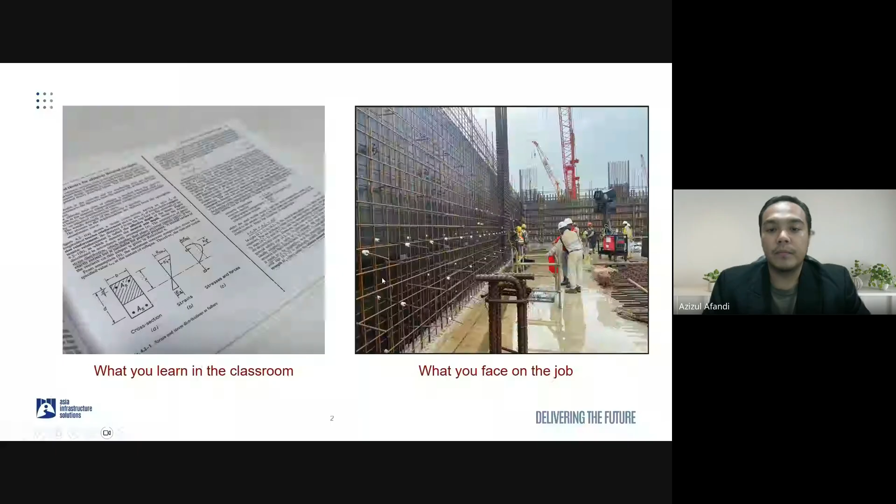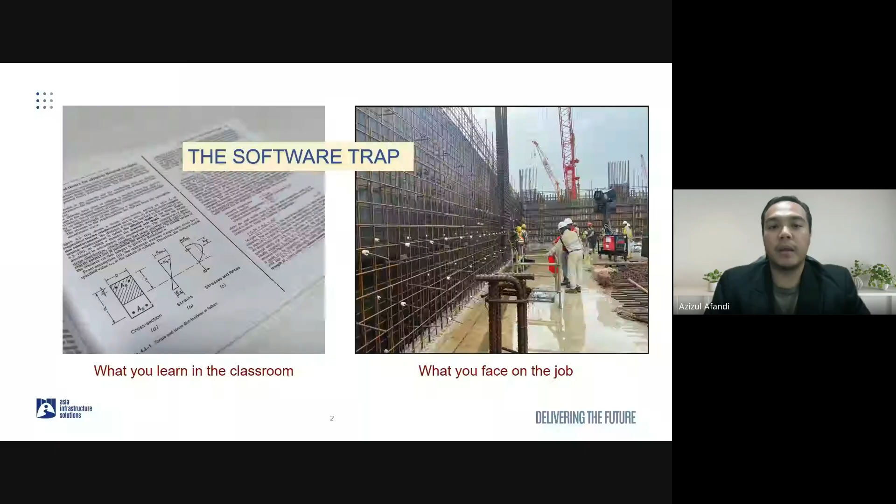But there's some dilemma when you start work. First of all, you will be overwhelmed by the software, so some new students or fresh graduates might get trapped in the software - we call it software traps. And also there will be real world constraints, and we also need to apply engineering intuition.

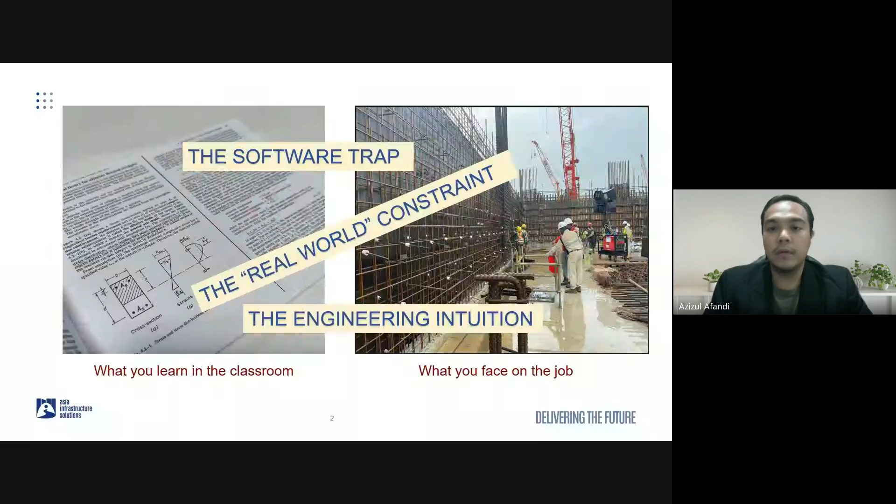So today we're going to go through around four basic topics. The first one is the design flow, how we do a typical bridge design from the blank page to buildable drawings - but I'm not going to go through the design parts in detail, just explain the flow of the work overall. The second one is a case study I prepared, one of my previous jobs, the rail track slab design - a simple structure but quite interesting. The third one is the sanity check, how we ensure our model is correct. And the last one is the rule of thumb for engineers, which I'll touch on a bit.

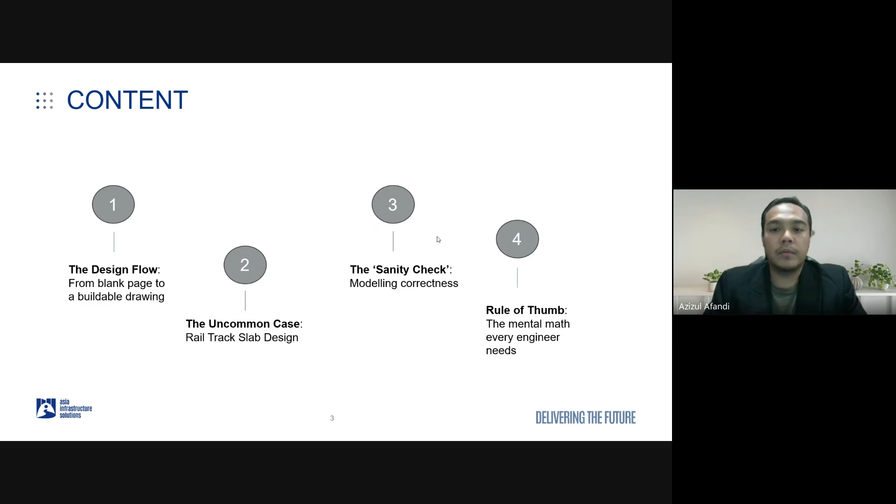So let's go straight to the first topic, which is bridge design flow.

I'm not sure whether your course has a bridge design module. For myself, I previously learned bridge design during my master's; during my degree, I wasn't exposed to the bridge design concept. Basically, bridge design is quite different compared to typical building design.

So in general, when there's a project, the first thing is that we need to plan. We need to have the plan and what is going to be done. Then after that, we're going to get the profile, because this is the bridge. Usually a bridge will serve either roads or rails. So it's either coming from the road engineer, rail engineer or alignment engineer. It depends on the type of the project.

So then the alignment engineer usually will provide the profile, the design profile, and then the sections of the road or the rail: what the width is, for example, how wide the road is, is it the typical R2 JKR road, or is it a highway? So that is coming from the alignment engineer.

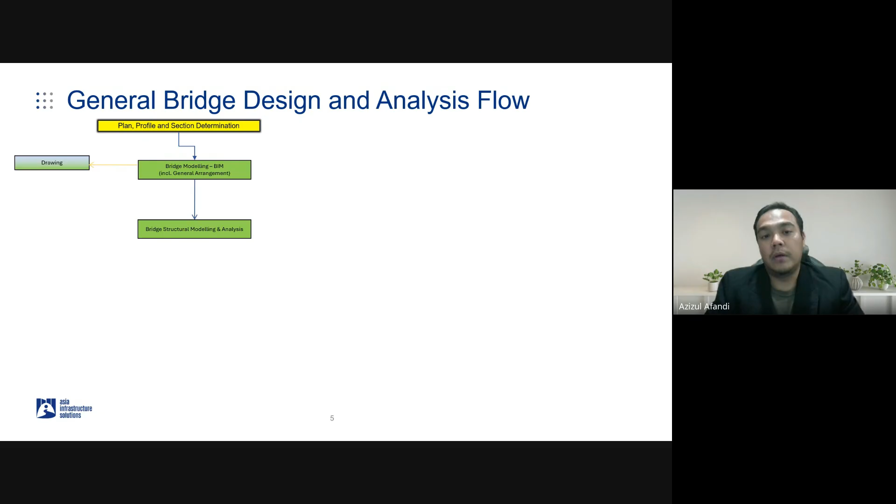So he will straight away get the drafter to start the design concurrently, instead of waiting for the modeling and the analysis design to complete. So this process goes concurrently.

Okay, so before the engineer starts the modeling and analysis, of course, we need to gather the information, like what's the load input that we're going to put in our models, what are the load combinations, the information from other parties, like from geotechnical parties, to get their information on the soil modulus and also the soil springs, for us to model in our software. So all these have to be based on the relevant codes or codes of practice.

For example, in Malaysia, we are now moving to the Eurocodes, or sometimes we still use BS code. So it depends. Singapore is already fully using Eurocodes, and Singapore even has its own Singapore annex. For Malaysia, some of the codes still don't have the Malaysian annex, especially for bridges. I think it's still following the UK annex. So from the codes we determine the loads. For example, for the bridge, how we determine the wind loading, the temperature loading, the traffic loading, everything is from the codes.

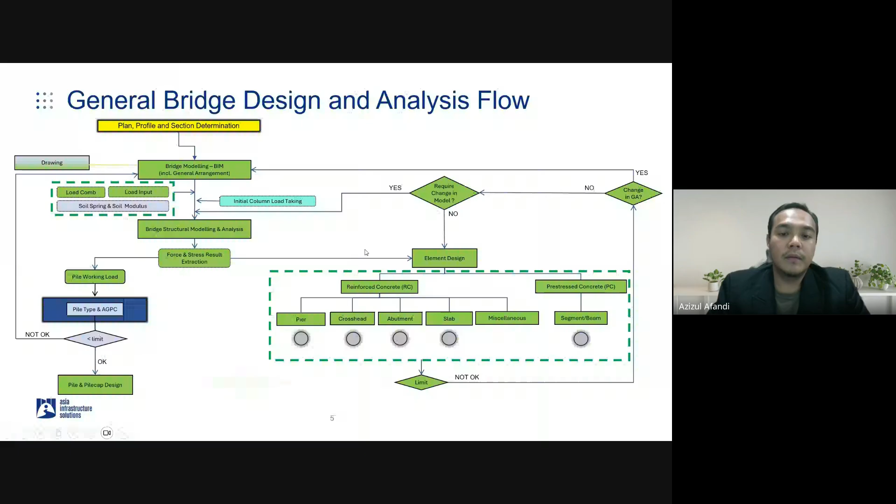Or if we need to change the structure model, then we go back to our modeling, and again we change everything. Then the same process comes again until everything is fine. Okay, then if everything is okay, we have to determine whether we need to do optimization or not.

What is optimization actually? I seldom heard the term during my study last time. But when we come to the industry, we will always hear this terminology, optimization. Usually the client will love this terminology because optimization means that we design it close to the limit, meaning it is a very economical design. So the client will like it.

So if we need to do optimization, meaning our prelim size, for example our prelim crosshead, is too thick or too wide, and after our analysis we found that the utilization ratio is just maybe 0.6, so we have around 40% buffer, definitely we have to justify to the client why we designed it that way. So in that case, we have to do optimizations. We come back to our modeling, then we reduce the size, for example, or increase the rebar, and then do it one more time until it's optimized.

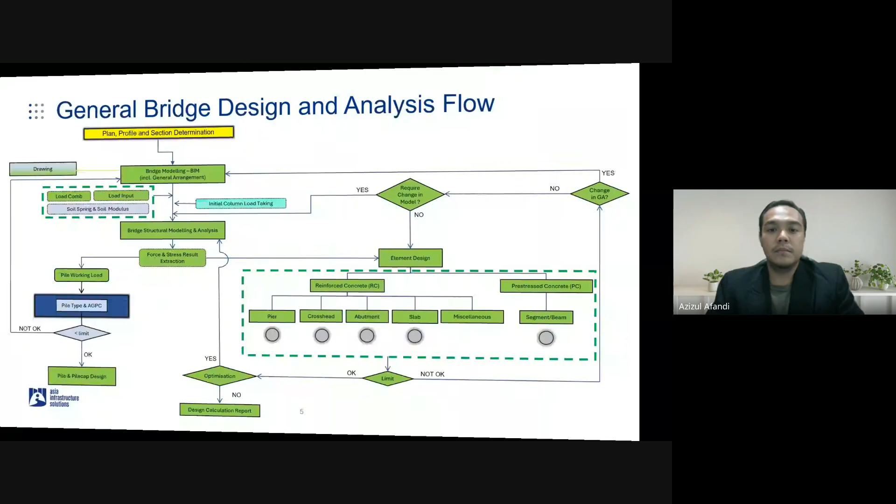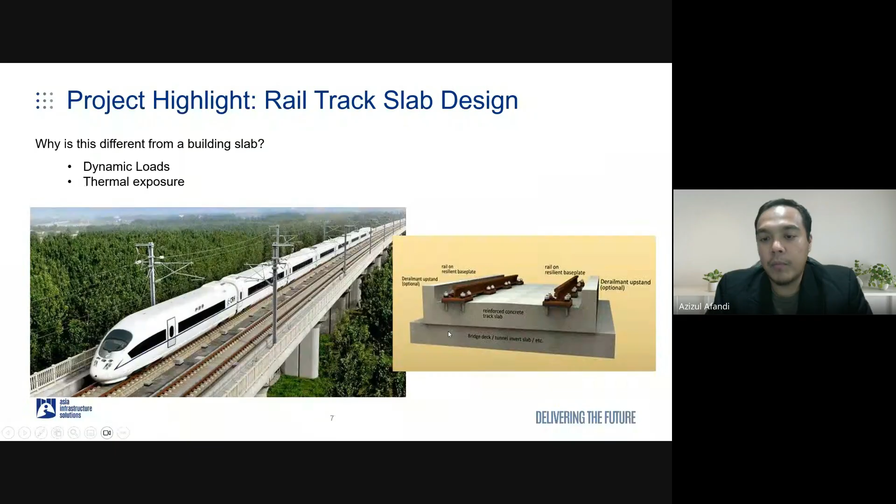Okay, this is the geometry of one of the track slabs that I've designed before, for the Palembang project in Indonesia. They have an existing bridge there, but they waited maybe 1 or 2 years before installing the track slabs. Then they appointed us as consultants for the track works designs.

In this case, the track slab will be cast in situ concrete. Sometimes the track slab can be precast as well; it depends on the preference of the clients. This is what I said just now: the fastener, or direct fixation fastener, we call it DFF. It's fastened to the track with anchorage. So how are we going to design this track slab? Because it's a slab, but it's sitting on another slab, and it's also exposed to the weather.

So first, in this case we are going to use the strut and tie method to design the main reinforcement. The main reinforcement will be the transverse reinforcement. Then the other reinforcement is along the track. You can see what I've drawn here. The interesting part is how we determine the strut and tie model.

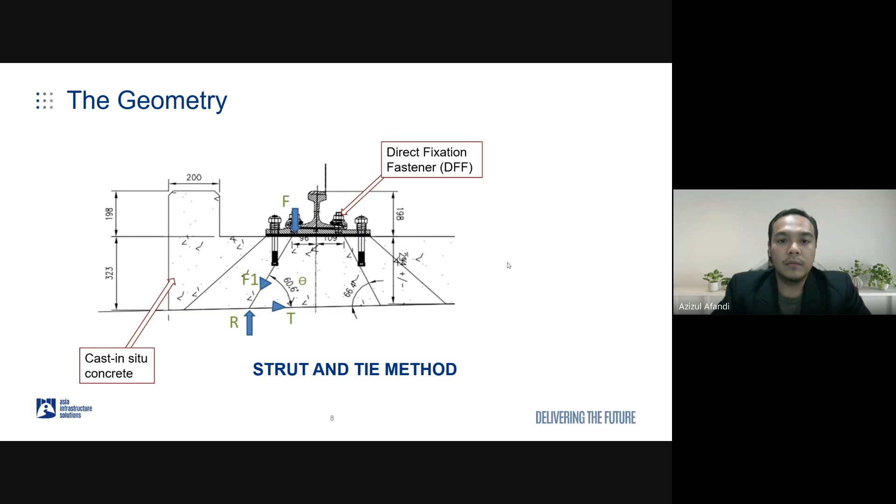So this is how we calculate the strut and tie method. So we got the force. The force is from the codes. Usually the codes will determine what's the force. So in this case, 146 kilonewton per meter is already times the ultimate factor. So with the degree of 60.6, we recalculate using trigonometry, and then we get the tension force at the bottom of the slab.

From there, we compare. So we get the stress, and then from there we determine what's the capacity. So in this case, we put in the reinforcement as 10 mm diameter with 300 spacing, and then we calculate, and we found that the design is satisfied. The force is less than the tensile capacity, so the design works.

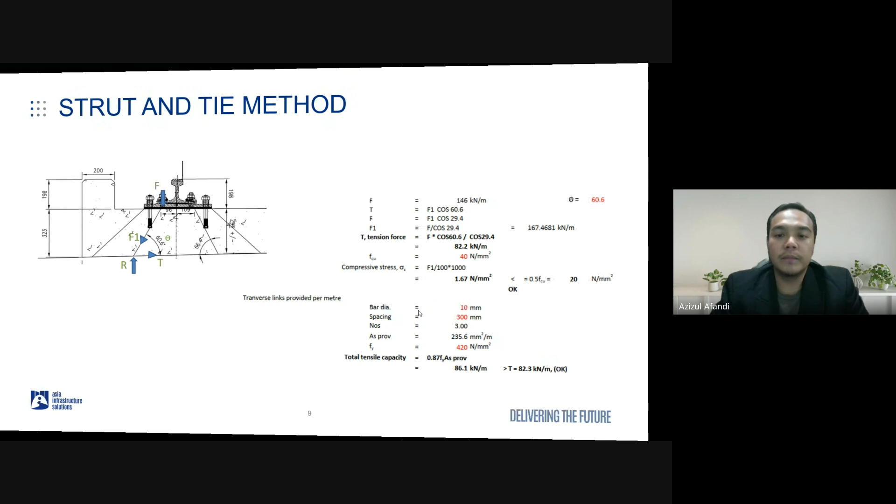And then other than that, what else we have to check other than the strut and tie from the direct force? The next that we are checking is the differential temperature effect. So here, as you can see, this is the typical behavior of the slab when it's exposed to weather.

Okay, I have a short quiz here now. It's a very simple question. You can answer like A or B, or maybe Dr. Mazlan can do a quick poll so that they can give the answer, just for the engagement. Okay, if you look carefully at this diagram, do you think the diagram is correct?

Okay, guys, you can type A or B in the chat. Try to answer that in the chat room. So which one is the correct one? No, the question is whether this diagram is correct or not. You have to look carefully. Just give it around 30 seconds. But how to do the poll, doctor? I'm not sure, haven't done before. Never mind, try to answer in the chat, so at the same time we can take your attendance.

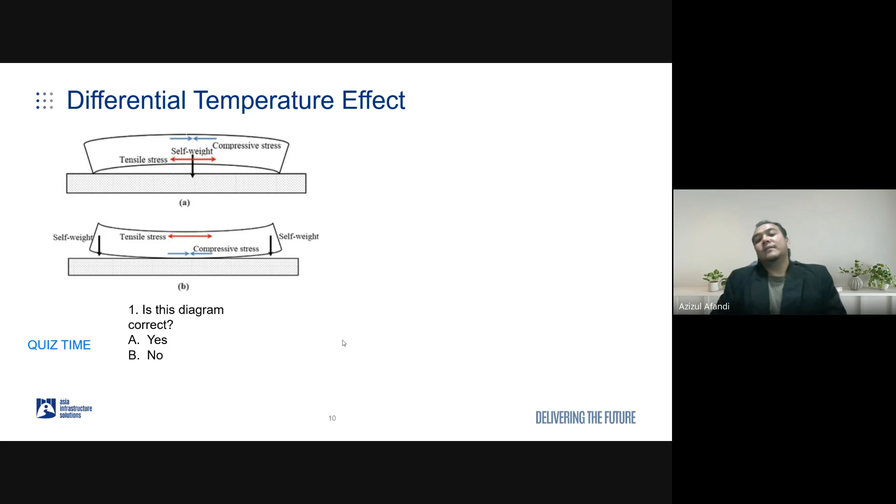So actually the answer is it's a correct diagram. You can get this diagram in journals. The diagram is correct because this is a differential temperature effect. I think I explain later because there's another question. So, question two. We know that this diagram is at the day and also at the night. Which one is at the day? The top one or the bottom one?

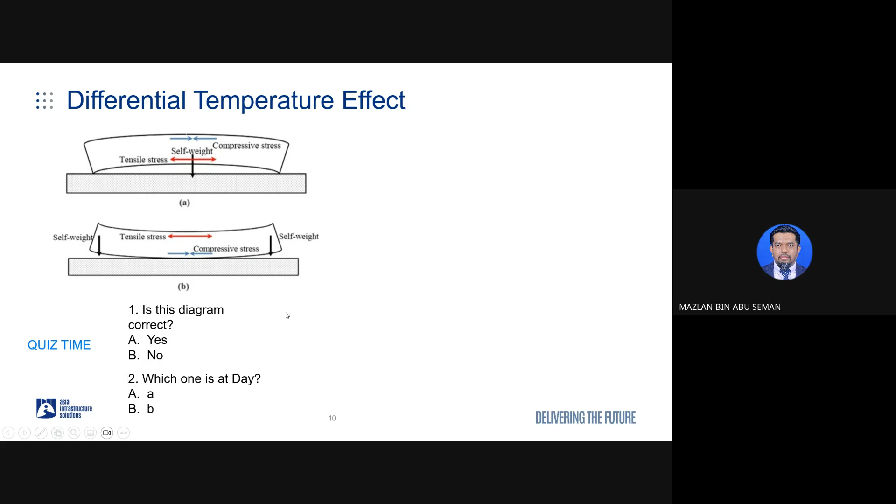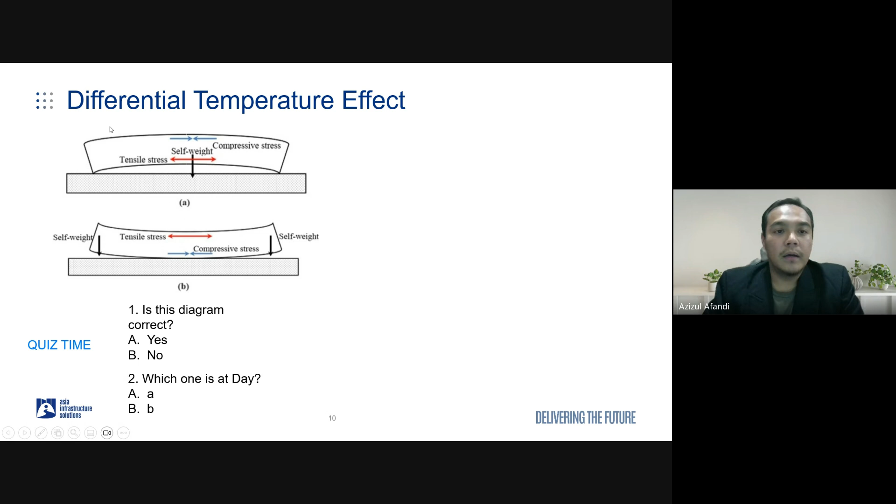So the top one, I think most answer A. So A is correct. The A is at the day. But why is this diagram correct? Why the compressive stress at the top, but the tensile stress at the bottom when it expands? So at the day, the top part is going to expand.

It's actually not the top part expanding, but the bottom one shrinking because of the difference in temperature, since the top and bottom will have a temperature difference, so the slab starts to shrink. When the bottom starts to shrink, the top tries to compensate and bend. But the slab has self weight, so when the concrete starts to bend, it restrains itself. When it restrains itself, it exerts compressive stress at the top. This is interesting - at first we were also confused, but that's actually what's happening.

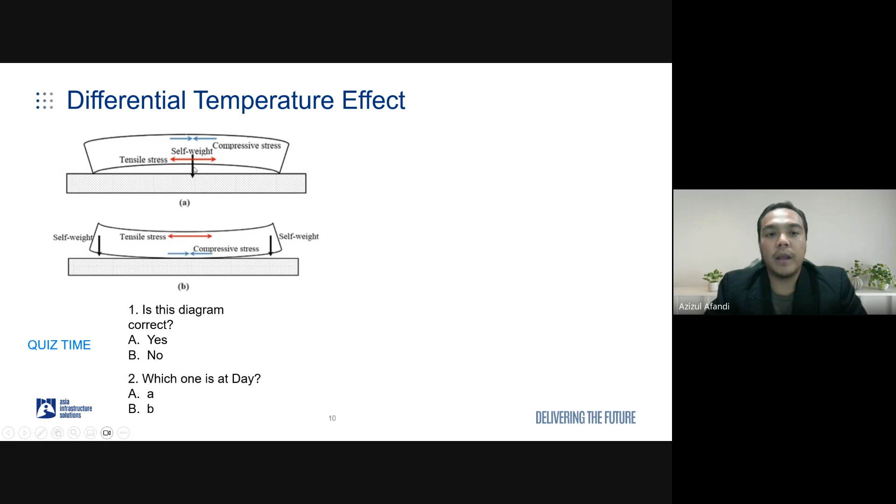Same goes for the bottom one. At night, the top part will be cooler compared to the bottom part, and the bottom part will be warmer compared to the top. Because of that, it starts to shrink at the top, but due to the self weight at both ends, it compensates back and pushes back, creating compressive stress at the bottom part. So when it's meant to crack, it cracks at the tensile stress part - during the night it cracks at the top, but during hot times it cracks at the bottom. That's what's happening actually.

So if you don't trust me, you can do your own study on this. Based on this, the code gives us a guide on how to handle the differential temperature effect.

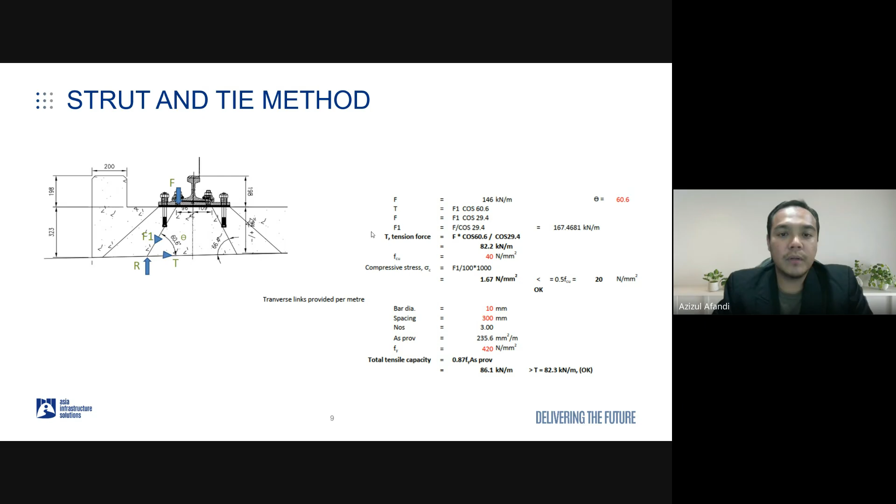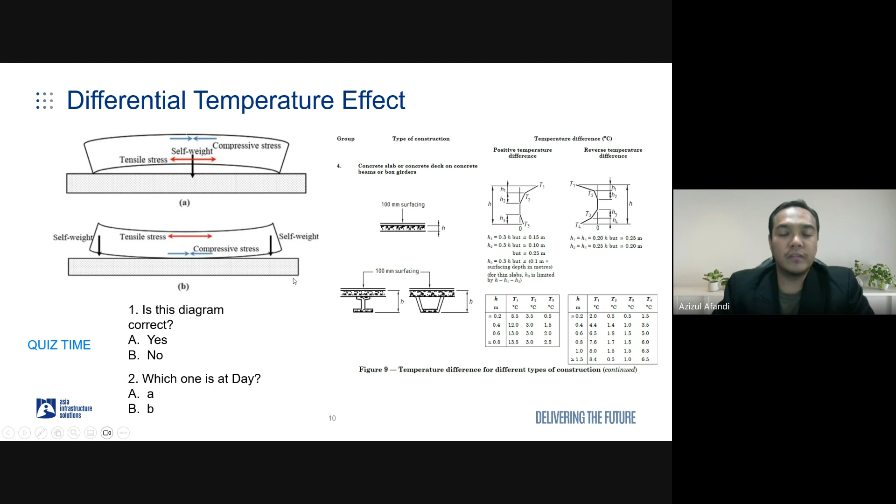In our case, our H, which is the height, is around 300 something. So from this, the 300 is easy - meaning this is just the differential we are going to assign to our structure. The top part, in this case, is around a 7-degree difference from the top to the bottom of the slab.

So what do we do? We do a 3D solid element analysis. In this case I used Staad Pro to do the 3D solid element, modeling the full slab. Then we assign the temperature load as per what we calculated just now. From there, after running the analysis, we got the results. This is a result summary from Staad Pro.

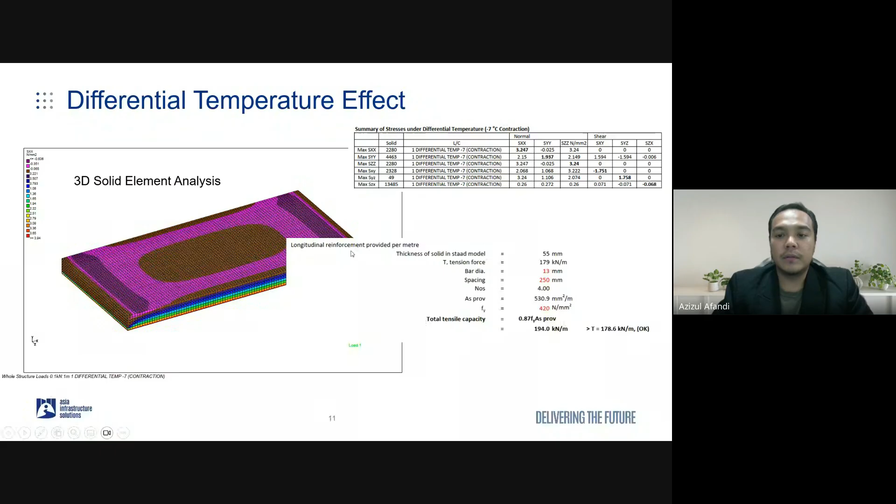So from here we check our tensile capacity, comparing it against the force we got from the analysis. In this case, the tensile capacity is still okay, meaning it's more than the force, so our current reinforcement provided is okay.

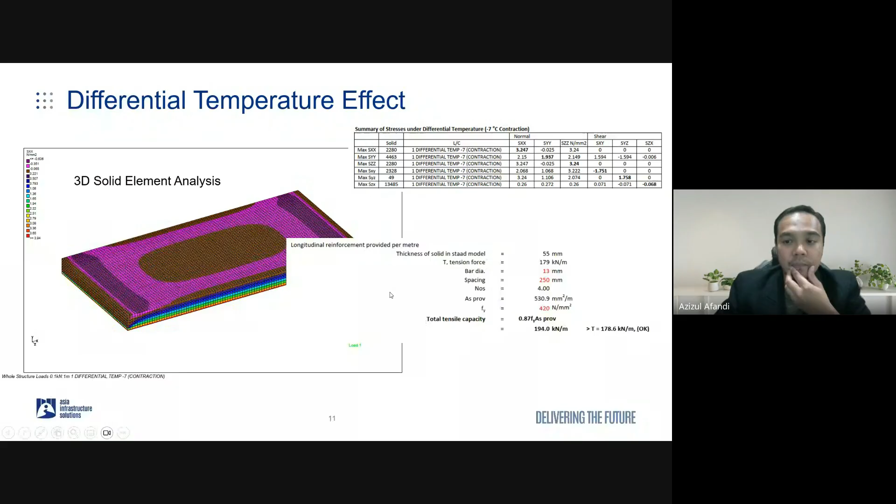Other than those two checks, we have other checks as well - typical checks, basically the minimum early thermal crack check. This is to prevent early thermal cracking - I think you may have already encountered this in your studies. Another one is the minimum reinforcement check. We have to check all this to ensure we still comply with the codes.

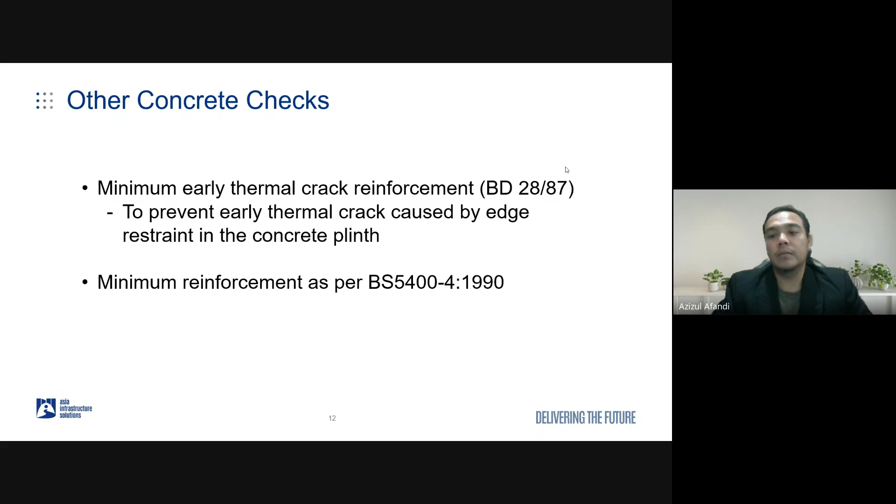Okay, so now we've finished the design of the bottom slab. Then we are now designing the derailment wall. This upstand curb is what we call the derailment. In this case, I analyzed it using a 3D plate element analysis in Staad Pro to get the forces.

After that, I use ASBD, which is Autodesk Structural Bridge Design, to model the sections with reinforcement to calculate the capacity. This Autodesk software can do the capacity calculations of the concrete. Then we compare it to see if our design is okay or not - this is how we calculate. Basically we have the derailment load from the codes, which should provide 100 kilonewton, based on the UK NA.

Derailment is actually an accidental load case. It's when the train suddenly derails from the rail, meaning it drops from the rail, and then the derailment upstand tries to contain the train from going further sideways. So if the train derails, it will still hit the derailment wall and stop there, safeguarding the surroundings during the accident.

From this, I do the 3D plate analysis, similar to just now but using different elements. Previously I used solid elements; in this case I use plate elements. There's a difference between the two. To benefit the analysis, I just use the plate because I want to understand the bending moment and the shear, that's all.

So I model the full length, apply the loads at the nodes, and come up with the results. In this case, under ULS, we get 35 kilonewton meter per meter, which is the maximum bending moment at the bottom of the wall.

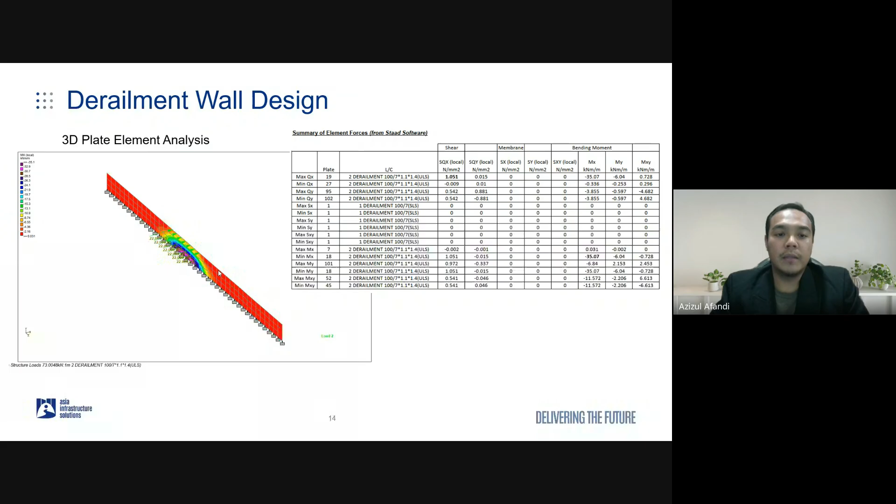Okay, and then we do the section analysis in ASBD. It's just the sections, but we design it per meter because we want to compare with the kilonewton per meter, kilonewton meter per meter bending moment just now. So from here, this is the outcome from the ASBD.

We got the internal force, which is actually the capacity, the full capacity. This is the force that we apply, and we have a spare resistance, meaning that it's okay. So our capacity, the bending moment per meter, kilonewton meter per meter, is actually 53.6. This is the capacity, so we summarize it here. The design is okay.

Then we do the same check for shear. Shear also uses ASBD to come up with the shear capacity, with the enhancement and everything calculated, and we found that the shear capacity is within tolerance. The shear force is still less than the shear capacity.

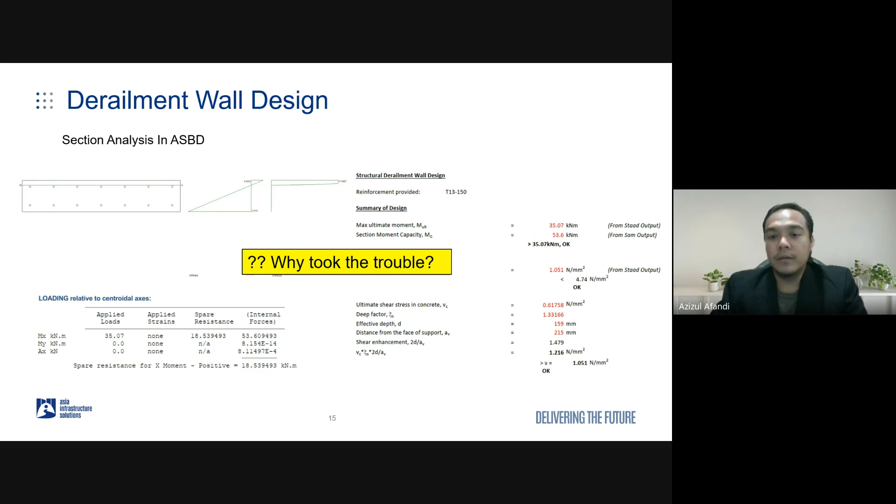But if you see what's happening here, it's troublesome, right? Why did we take such trouble, such lengthy work? For example, just now we did a 3D plate analysis in STAAD Pro and everything, quite lengthy to do the modeling of the elements. Why? If you think about it, we have the point loads, a lever arm, and it's like a simple cantilever. We have the width of the wheel. I think we can straight away calculate the bending moment, we don't need to do such analysis. It's like a waste of time, right?

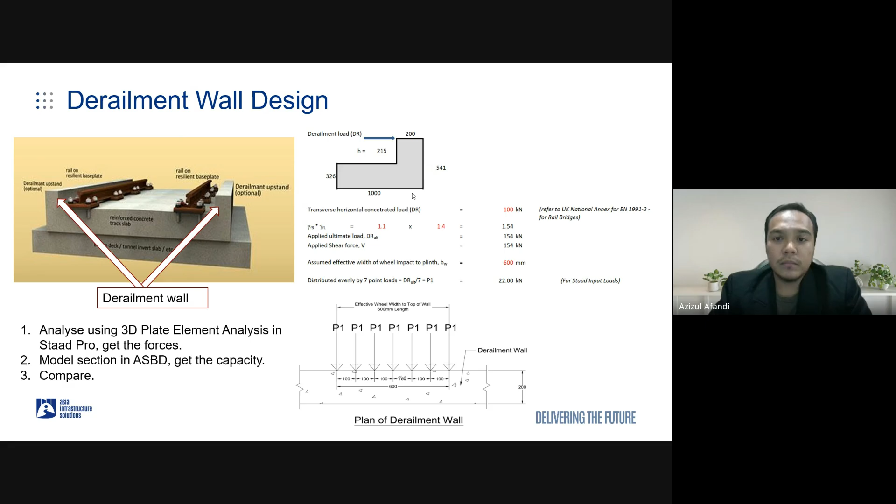So why are we doing this? Why did we take such trouble? I'm going to tell you why. But before that, let me show you, sir, like what I mentioned just now.

From this diagram we can easily calculate the bending moment, right? For a structural engineer, I think it's very easy, we know it straight away. We just divide by the width, we get the force per meter, kilonewton per meter, then times the lever arm to get the bending moment. I forgot to put that in, but then the bending moment, we just times the lever arm, and straight away you get the bending moment, 55.2 kilonewton meter per meter. So why did we take such trouble to do the analysis just now?

Just now we found out from the ASBD that the bending moment capacity is only 35.6... 53.6. So with our simple analysis, it's failed. But the analysis using STAAD Pro can pass. Why is that? What is happening here?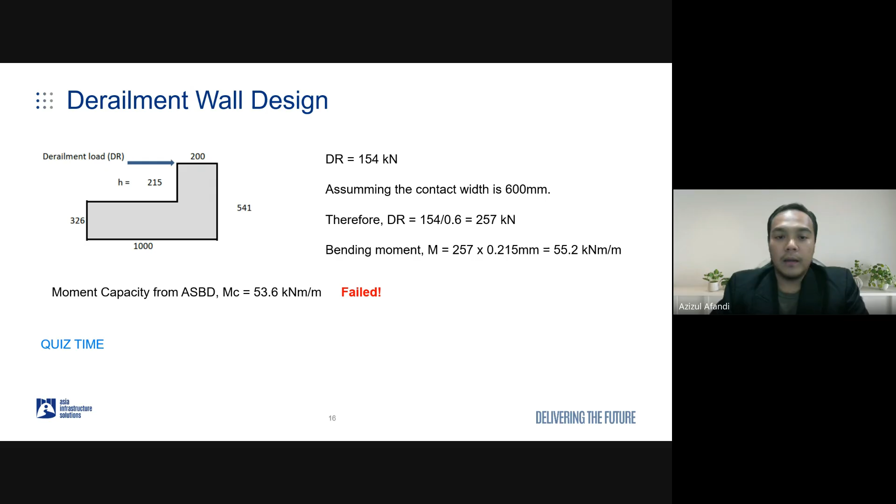So I have a quick quiz. It's quiz time now. Which one is correct? The first analysis with STAAD.Pro, or the simple bending moment calculation? Which one do you think is correct? You can answer.

What do you think? Is it A, the plate analysis is correct, or B is correct - the moment calculation just now, the point loads times the lever arm, got the bending moment? Or C, both are correct, or D, both are wrong. So which do you answer?

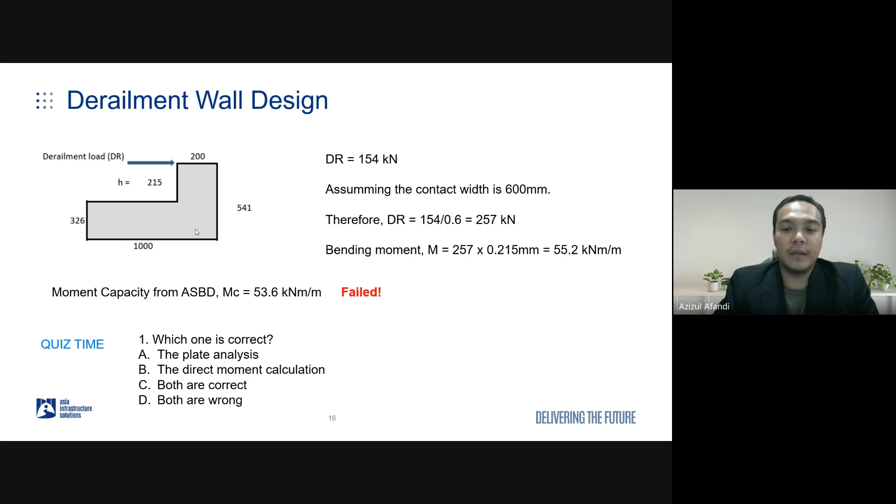Okay, looks like from the replies it's A. Hmm, but I can see some other answers. Okay, so the correct answer is actually C. Both are correct, both are not wrong. Most of you start to answer C. Yeah, correct, both are correct. It's not wrong at all. But why is that? Okay, so this is the answer.

Actually, it's a finite element method. As explained here, especially with the beam and solid elements that we use, it includes shear stiffness. So finite elements include shear stiffness. That's why the results tend to give lower values compared to conventional calculations, especially in the bending moment, as well as higher deflections. The bending moment tends to be lower, but the deflection could be higher. This is as per the Timoshenko beam theory analysis.

Timoshenko is actually the father of the finite elements, you can say. Before that, we used the Bernoulli theory to calculate the bending moments, right? But when the Timoshenko theory came, finite elements started booming, everyone started to use it, and then the software also started booming to use finite elements.

So why do finite elements give such results? It's because of the shear stiffness. If we model it all as small discretized members, each one as a mesh, between this mesh they share the stiffness. If you understand finite element behavior, the stiffness is distributed evenly between nodes. So the stiffness tends to be higher.

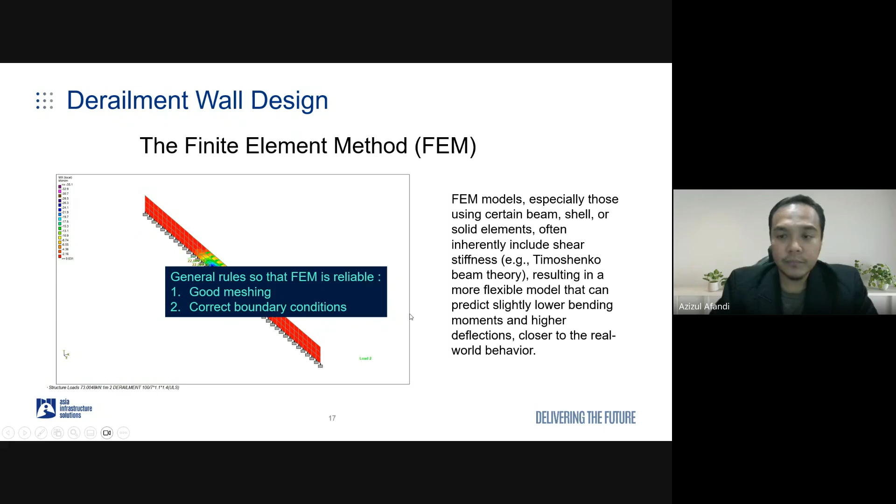So I think that's about it. Actually, I wanted to share more. I think we are almost 1 hour already, but I have a few more slides that I'm going to share with you.

What I mentioned just now, the sanity check - what is that actually? The sanity check is what we do after we do the analysis. What is it about? I'm not sure whether you already... I think you are already in the third year, going into the final year.

You're going to have your final projects, right? I think some of you will do numerical analysis, some of it maybe a field study, but some will do numerical study. When you do numerical study, you will do more finite element design analysis or structure modeling.

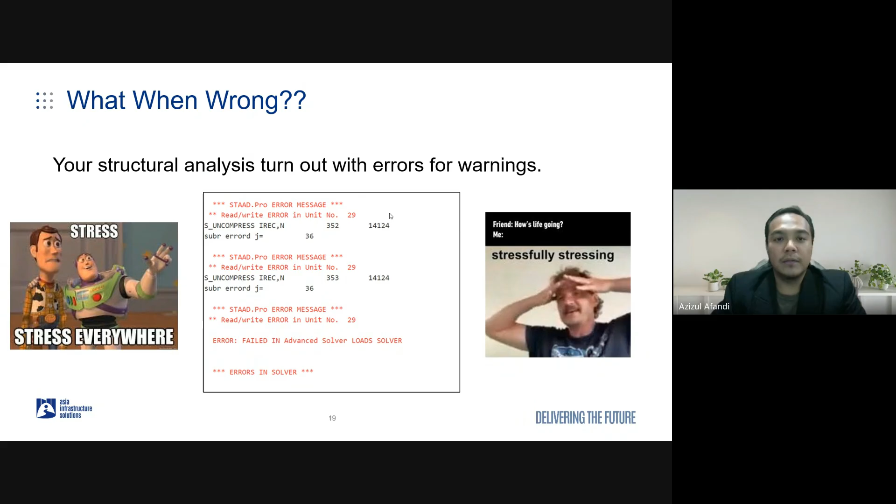So when you do structure modeling, definitely you will come out with problems with errors like this, when all the red color coming out. So most engineers try to find out what's happening, what I've done wrong. So they start to stress because of the error. They always ask, so what went wrong? So you have to know - this is the sanity check.

So we have to do the debugging of the structure model when we found the error. So what are you going to do?

So don't worry, but eventually over time when you do a lot of analysis, you will start to master this - call it the art of diagnosing the problematic structure model. We call it debugging in IT terminology, but I call it diagnosis, more like doctors. So we try to diagnose what is happening with our model, what went wrong.

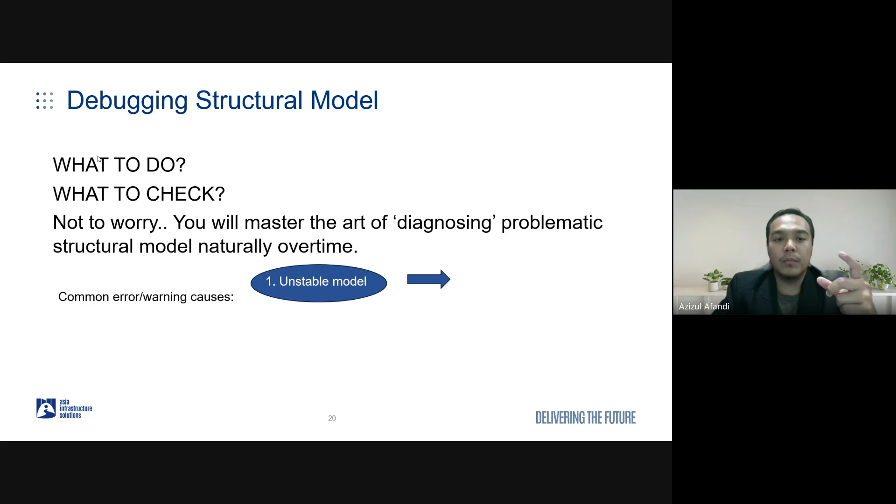So I'm going to tell you the common errors that cause the error and warning. The first one is usually an unstable model. So how are you going to determine whether your model is unstable or not?

First you have to check the restraint. When you find the error, check whether your model is unstable - check your constraint, your restraint, your boundary conditions, and also your supports, whether correctly applied at the correct nodes, for example. The second one is disconnected elements.

You could have disconnected elements. For this, you have to check whether there's duplicate nodes and beams. Sometimes the beam will not connect with each other because it's connected to two different nodes. The third one is incorrect material properties.

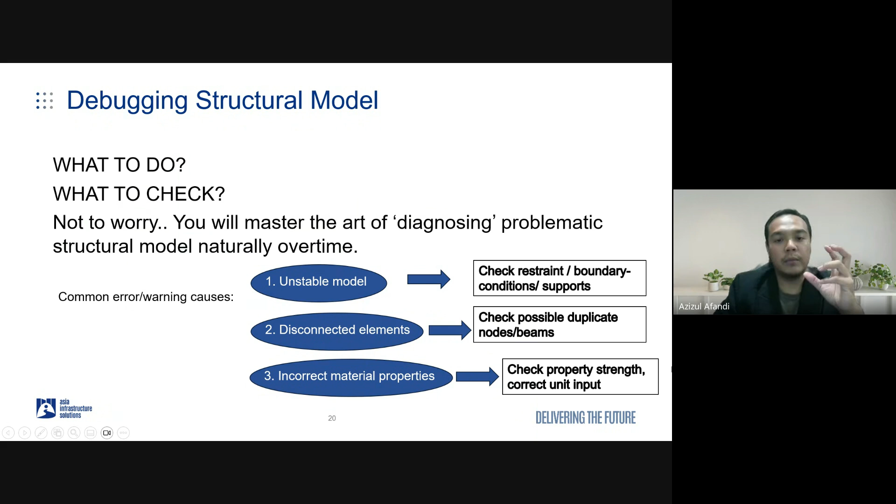So you have to properly check your property strength. For example, for a steel structure, check whether the yield strength is correct, or for concrete, whether you put the correct strength. Sometimes you also have to check the units - sometimes we put different units, but the model is picking out different units, for Newton per millimeter square for example, but you put it in terms of kilonewton. So definitely the property might go wrong. These are the three core issues that, based on my experience, will give you errors in the analysis.

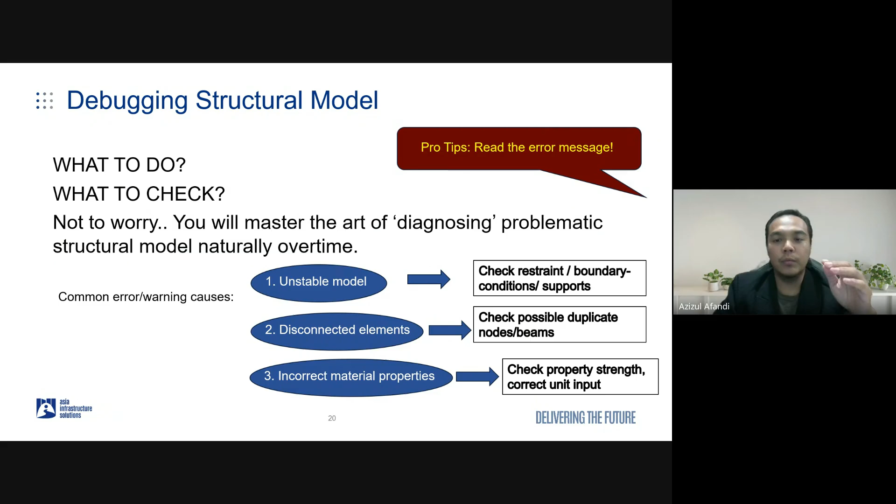So some pro tips here: usually you just read the error message. The error message will tell you what is happening and where it is happening. So read it, don't forget. I think I'll go through this faster because we're overrunning a bit. So can we finish it? Okay, yes we can.

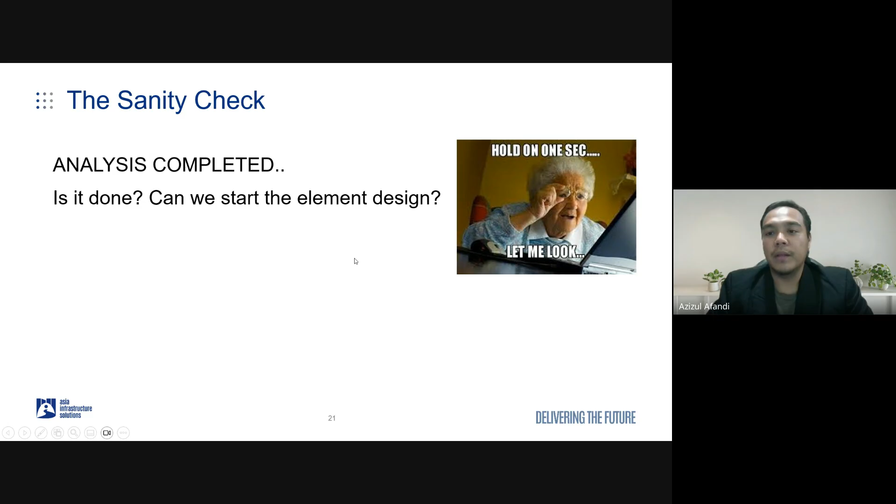So once the analysis is complete, is it really done? Can we start the element design already after you finish the analysis? Wait, you have to hold on a little bit - are you really confident that your model is correct? We have to ensure our model is correct first before we jump straight to the analysis. So please do check your model first.

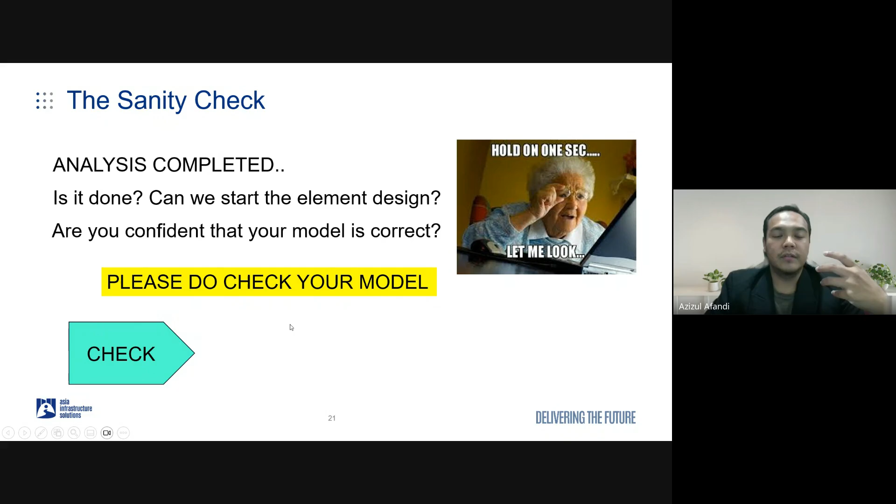So how are we going to do the check? This is another sanity check for the structure. First, once you finish the run, there should be no errors, no warnings. If there are errors and warnings, you have to settle them first. Even warnings - although some engineers settle the errors but still have 10 or 12 warnings and just ignore them.

Don't ignore the warning. Sometimes warnings will also give you different results. So you have to settle the warning until you can justify it - why is it, is it because of the additional load, or maybe a blank load case for example, then it gives you a warning. That's okay, as long as you can justify that warning, then you can ignore it. So the first thing after you run the analysis is you should check the deflection results.

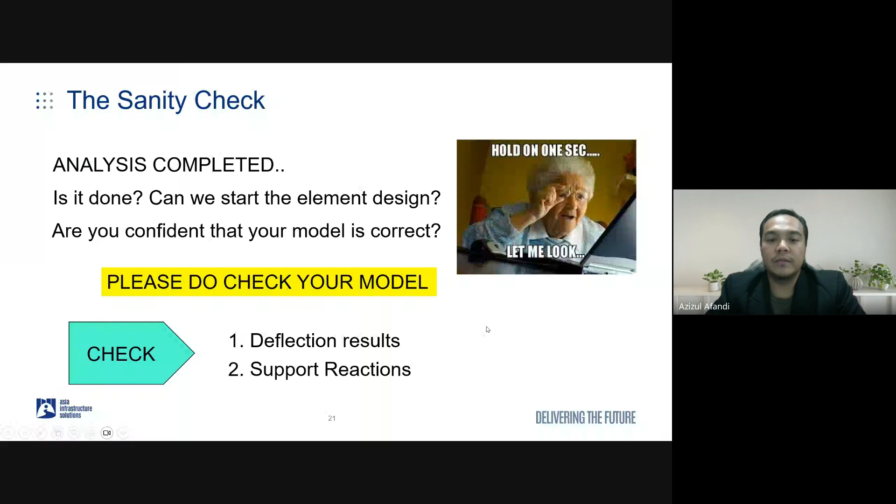And then there's the second one, the support reactions. These two you have to check. So some pro tip here: work out the preliminary support and column load take-down prior to the modeling. This is the one I mentioned first in the first slide previously, during the flow. Why do we need the column load take-down? Because the column load take-down we calculate based on the area method. So that is the most likely correct reaction that we should get from the model.

So when you check the model, you look at the support reactions; they shouldn't be far from that value. So if, for example, your load take-down is like 5,000 kilonewtons, but suddenly your analysis is just 2,000 plus, it's like half is lost. So you have to wonder why. You have to start to check your model. Then you have to quickly check everything again. Sometimes it might not be right there.

The deflection is even more important. Deflection will give you everything. At first glance, you already know whether the deflection is correct or wrong. To do this, you have to be very well versed in structural analysis. You have to know before you run what deflection you should be looking at. For example, if it's multiple spans, then you have to see where there should be sagging, where not, and where there should be very high hogging, in terms of deflections.

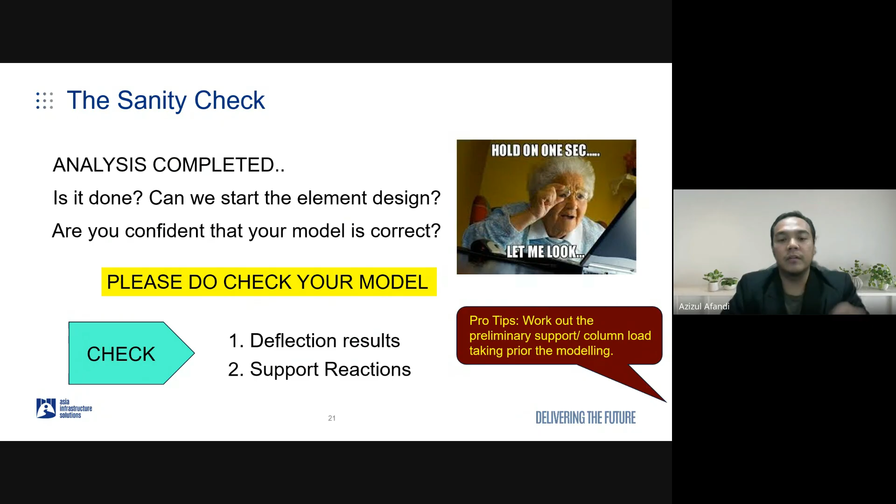So if your deflection is wrong, something is not right with the analysis, so don't bother looking at the results. You have to diagnose your analysis first, your modeling first. So that is part of it.

So the other one is whether you are an engineer or a button pusher. This is just some of the advice. Actually, the software is a powerful slave, but a poor master. So it should have a master, and the master is you. The modeler, the engineer, is the master of the software. You have to remember this. You don't simply blindly take the results from the software. It's powerful, but it's not a master. It could be wrong. Rubbish in, rubbish out, definitely. So you have to be careful there.

So the pro tip is that if you cannot estimate the result, for example the deflection or the bending moment diagram, then you cannot trust the computer. Meaning you have to make sure you yourself know what you are doing. For example, you do a frame analysis in the model, you should know what the bending moment is going to look like. So that's some of the tips. Then the final two, I think we're almost finished. This is some rules of thumb in doing the analysis.

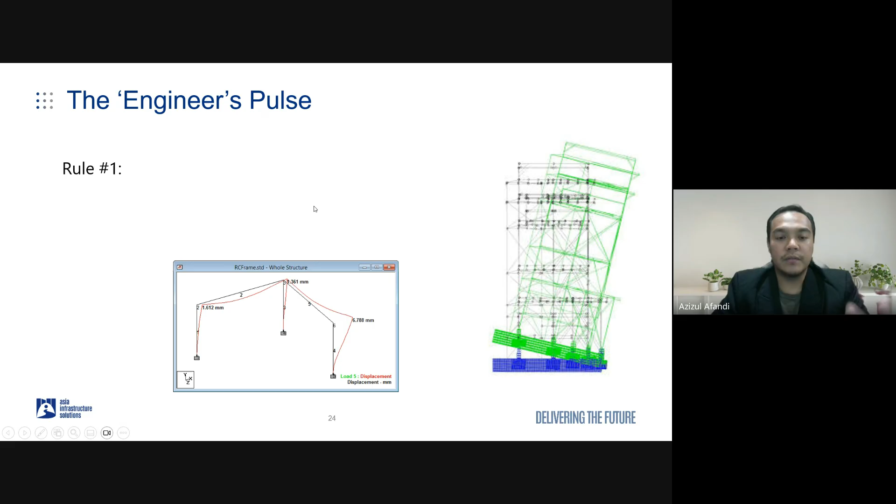So this is the deflections. Rule number one, as I mentioned just now, the deflection. The deflection is the truth. The deflection will show you everything. For example, look at the right-hand side. When you see something like this, definitely something is not right here. It could be because the compressive spring here is maybe not correct. So we have to look at the model again. So the deflection is the key.

So again for this one, although it looks very weird, why suddenly this side has more, actually it's just almost 7 mm, which is very small. But it could also be wrong because the behavior is quite weird. So we always have to be doubtful of our model. Not saying that you don't have confidence in your model, but you have to feel the confidence first. You say, okay, this is correct, so then I can proceed with the analysis, I can proceed with the element design.

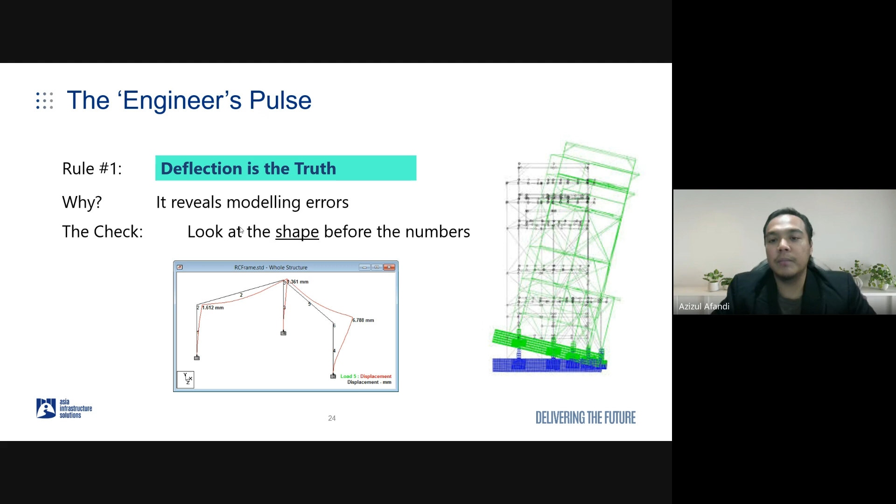Yeah, so this is what I mentioned just now. Why the deflection? Because it reveals modeling errors. First you just look at the shape, and you already know. You don't even need to look at the numbers. Numbers can be the second thing. The first thing is the shape. So I think this is the last part.

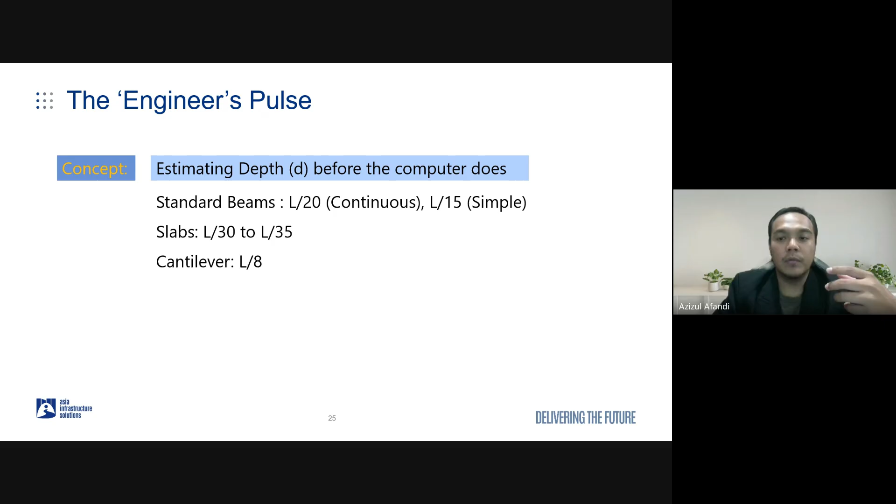So based on this, for example, if you have a 3 meter span cantilever beam, you can calculate: maybe I need this depth. So these are some of the rules of thumb that you should use. I'm not saying it's a must, but usually it's almost correct. It's fast and can ease your work later on, so you don't have to change so much. The variation is also not very big. And you can even pre-calculate your cost estimate. So you should have some confidence when you have these kinds of rules of thumb.

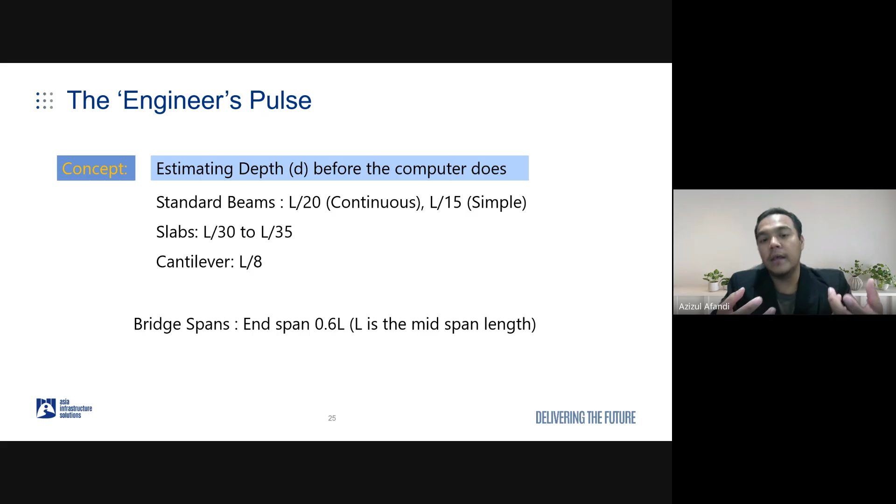And then for bridge engineers, usually we predetermine the span. We have to determine the span length. Usually the end span should be 0.6 of the length of the mid span. Why? Because anything shorter than that for the end span is going to cause uplift of the bearing, so we don't want that. In this case, 0.6 is the most ideal. Longer than that is not economical. So that's some of the rules of thumb that I'm going to share.

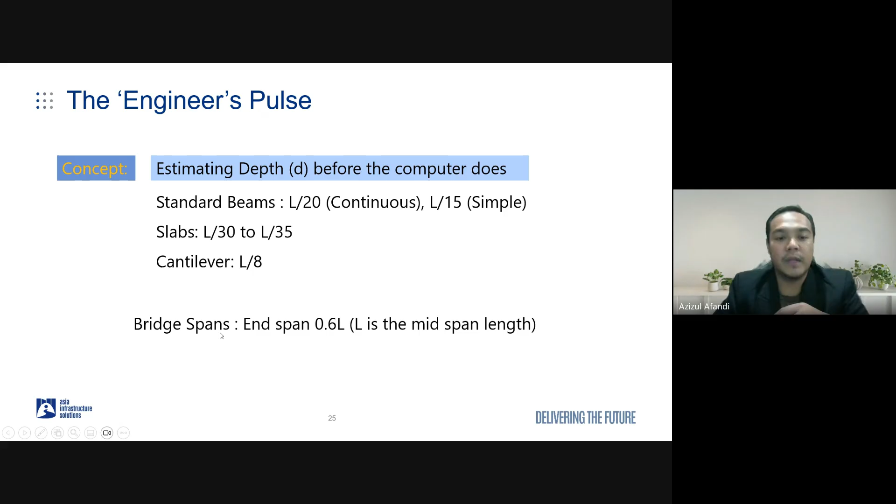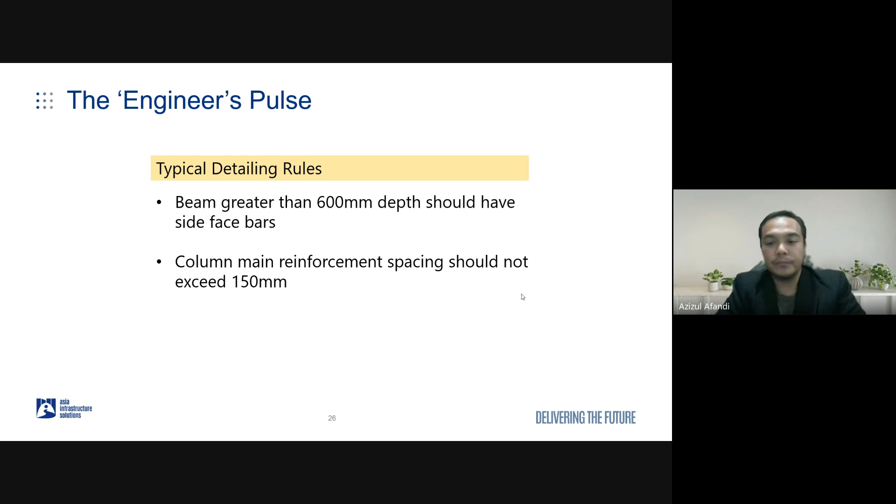Then another rule of thumb is for column reinforcement spacing. Usually the main reinforcement spacing should not exceed 150 millimeters. So from here you can roughly know the rebar percentage already. You can predetermine it. You don't provide very big columns with very little reinforcement, like more than 150 millimeter spacing. Yeah, those are some of the rules of thumb that I'm going to share.